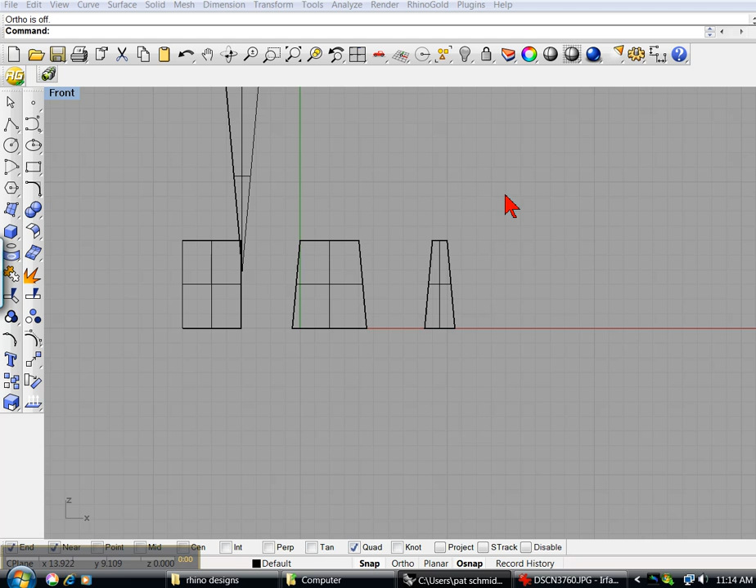One thing I failed to mention from my last video: how much you'll have at the top depends on how your tool path reads these angles when it generates it out. Instead of going straight down like here and cutting out that section right there, your tool path might read it so it doesn't touch the top at all, so it's going to cut it like this, and it'll hold your dimension at the top.

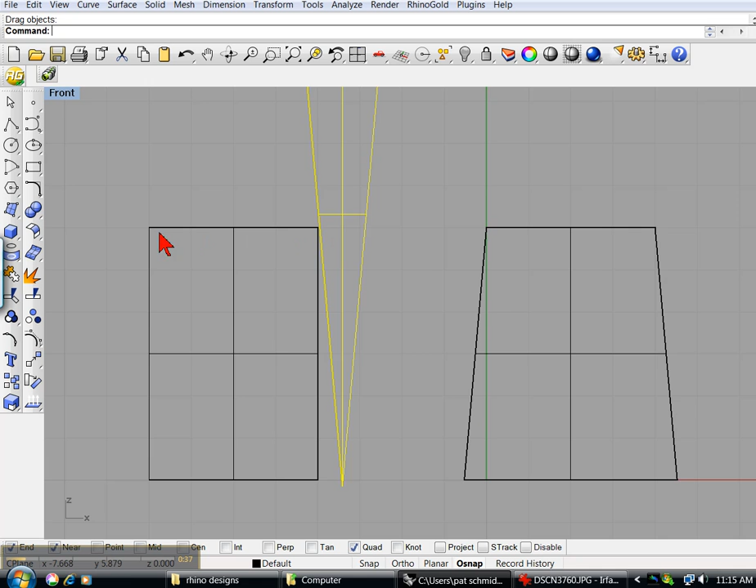So if that happens, from your 4mm prong, you now have 5mm at the base, because it didn't touch it. It left it where it was at the top and just scooted over this way, not cutting the top dimension. So your prong or wall grows at the bottom.

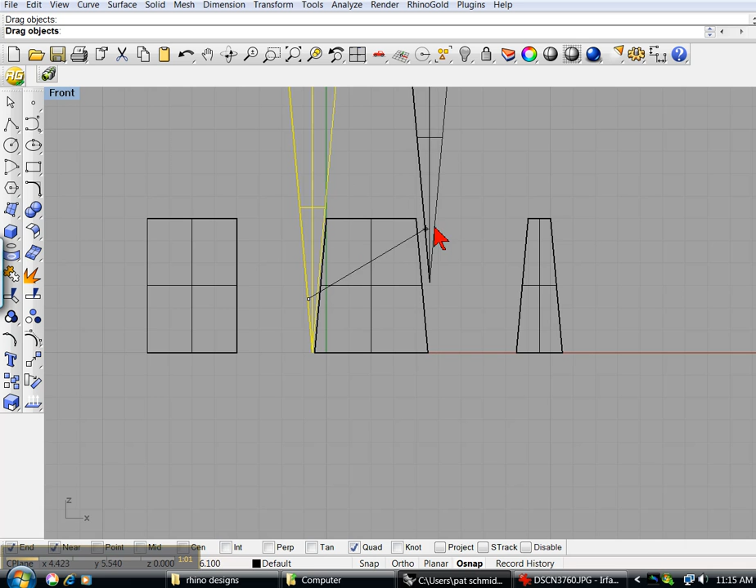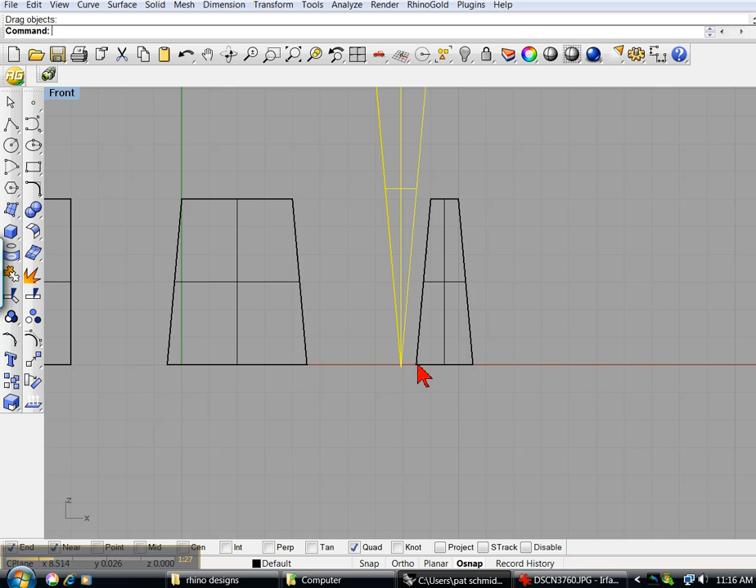If you had a 1mm prong or wall, you would cut it down this way. Now you're going to have at 1, 2, 3, this is 6mm, sorry, I might have said 5 on the last one. 6mm cut, whatever it is, you're still increasing the amount by 1/10 of a millimeter for every millimeter that you go down. So you might want to test your milling software and see.

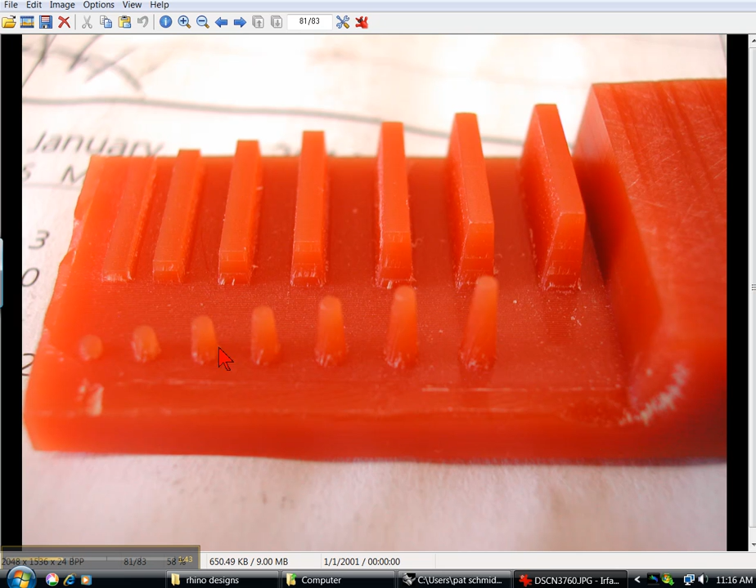Here I did 3, 4, 5, 7 prongs with a 1.5mm top, going down 1mm at a time. My tool path held the 1.5mm top. As you can see, it increased down the bottom, how they taper out like this. Same effect on a wall. A 1mm tall, going up a millimeter at a time.

And again, you can see how the wall has gotten thicker the farther it goes down. That's the way mine reads it. So my cutting paths leave the top alone but widen at the bottom. So you might want to make yourself up a plate that looks like this. Make some prongs, all the same thickness and width, just each prong a millimeter taller than the next one, and make a wall. Same thing. Start at 1, and each one go up 1mm, and mill it out and see what happens.

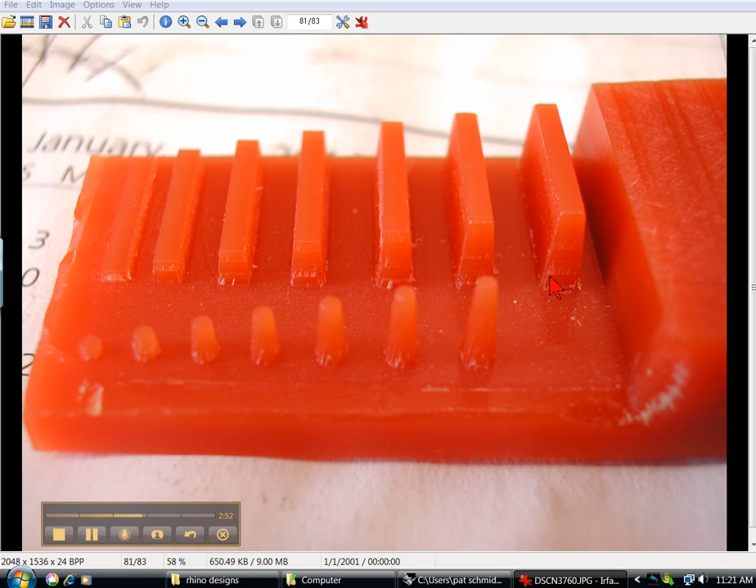This was all done as a one pass milling. So let's see here, I lost my picture. Well, anyhow, that was all done as a one pass milling, as you've seen. Let's see, we get back here. Nope. Yeah, I lost my picture for right now, but you got the point.

Maybe make up your own piece like that, and then you can measure for your designing, and you'll know better how to avoid the thinning of your walls or the thickening. Take that into consideration.